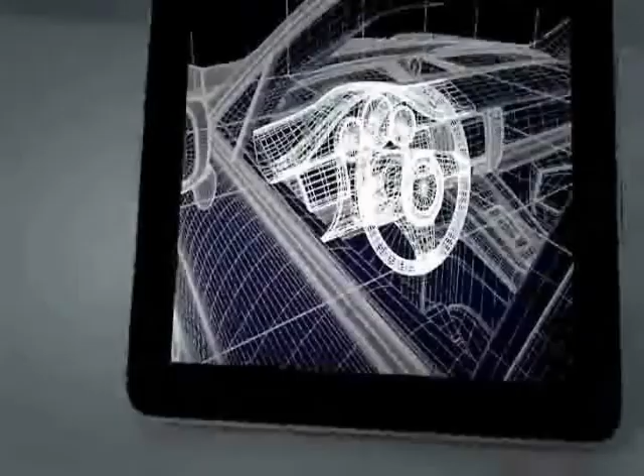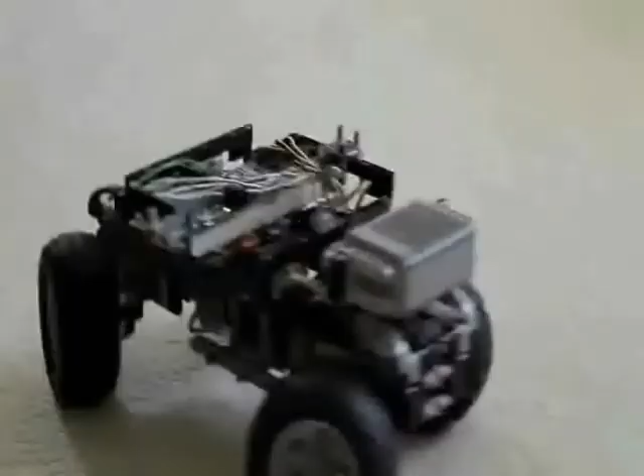The mission is to show several technological paradigms intended to illustrate and explain the relationship between artificial intelligence, deep learning, cognitive neuromorphic architectures, autonomous vehicle controllers, and complex mathematical algorithms with respect to machine learning as it relates to the autonomous vehicle platform. In addition, I will show an actual representation of an autonomous vehicle prototype.

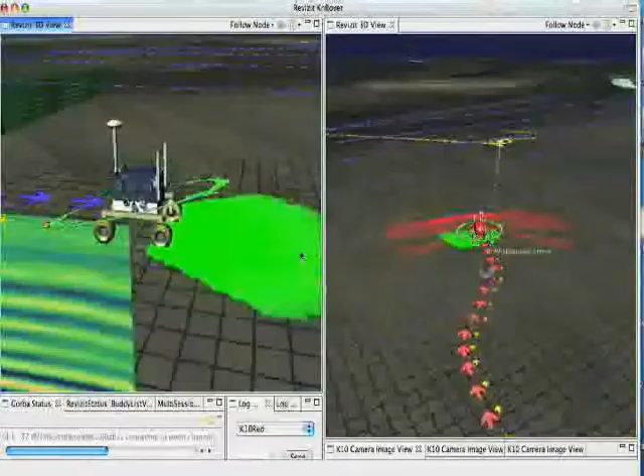Cognitive ability of the nervous system: neurons, dendrites, and synapses, neuromorphic architectures, and the deep learning science engineering paradigm. This segment of the presentation will illustrate how to build a deep neural net, choosing a number of layers and neurons with deep, densely connected networking strategies.

The artificial intelligence multi-layer network is composed of input node layers, hidden node layers, and output node layers. They specifically integrate the inputs and feed the information to the outputs, and you can create this with software mathematical algorithms.

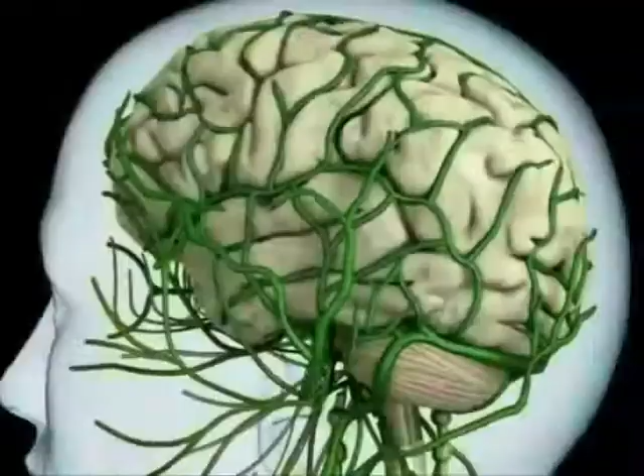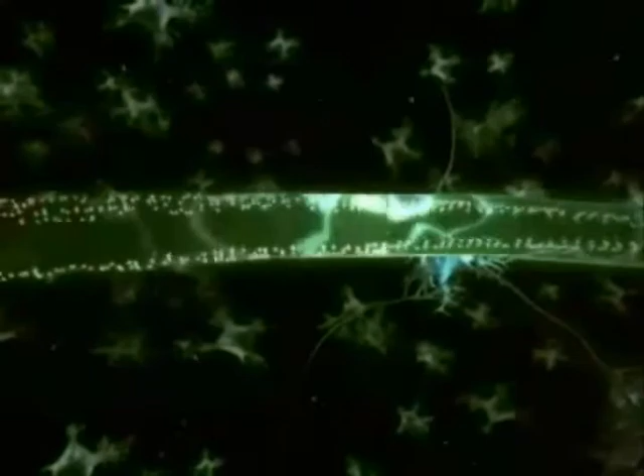Computational neuroscience is a branch of neuroscience which employs mathematical models, theoretical analysis, and abstractions of the brain to understand the principles that govern the development, structure, and cognitive abilities of the nervous system.

Artificial intelligence forms part of the cognitive engineering science, which is the scientific study of the mind and its processes. It examines the nature, tasks, and function of cognition.

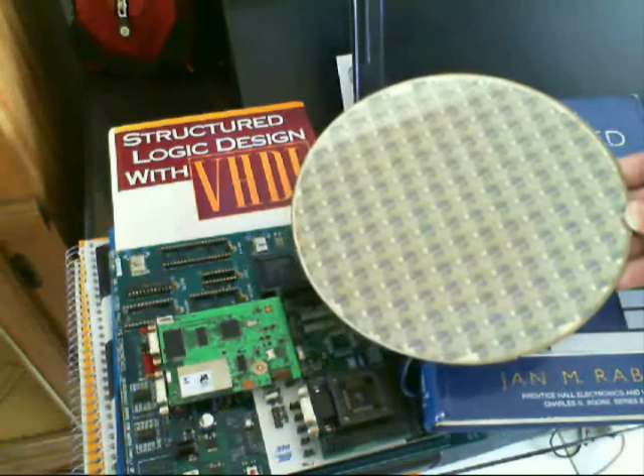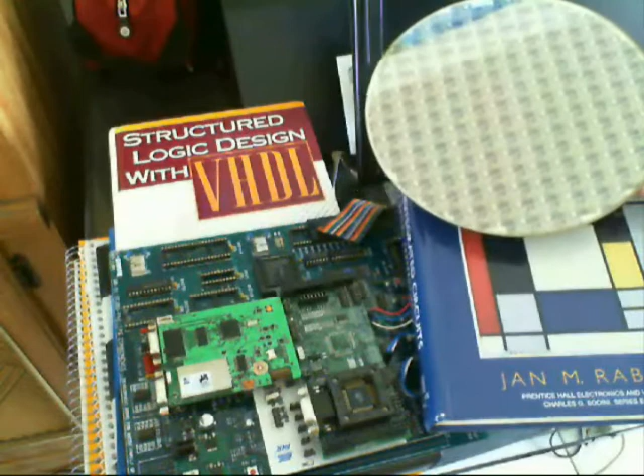These neuromorphic architectures model in silicon the massive parallel way the brain processes information, as billions of neurons and trillions of synapses respond to sensory inputs such as visual and auditory stimuli. Those neurons also change how they connect with each other in response to changing images, sounds, and the like. That is the process we call learning.

These architectures, which incorporate brain-inspired models called neural networks, do the same. That is why I have created this neuromorphic architecture and platform.

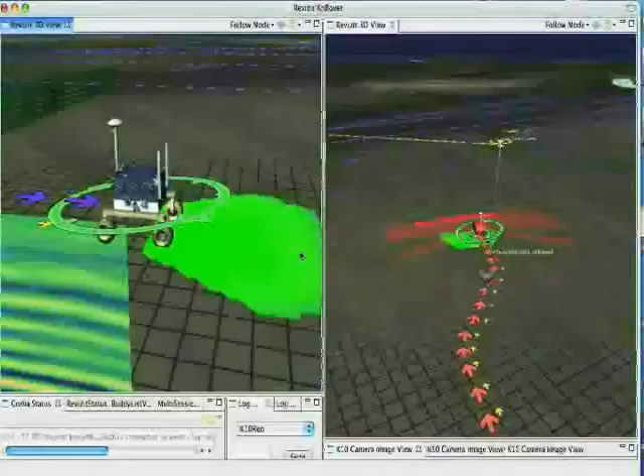The autonomous vehicle and robotics system uses a navigation algorithm for dynamic, uncertain environments. Moving obstacles are supposed to move on typical patterns, which are pre-learned and represented by Gaussian processes.

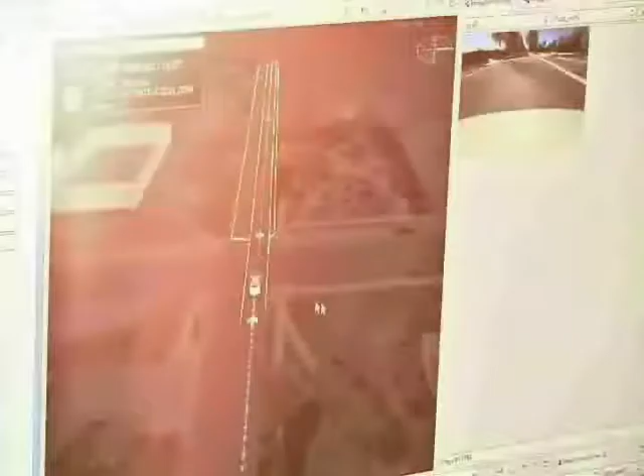A prediction function-based algorithm is used to implement robust freeway driving in autonomous vehicles. A prediction engine is built to predict traffic scenarios.

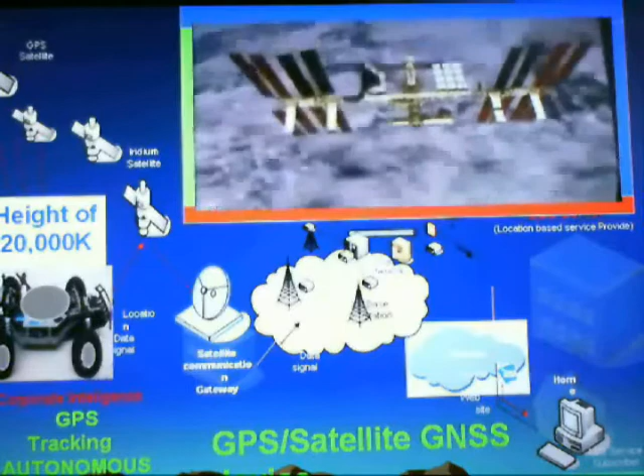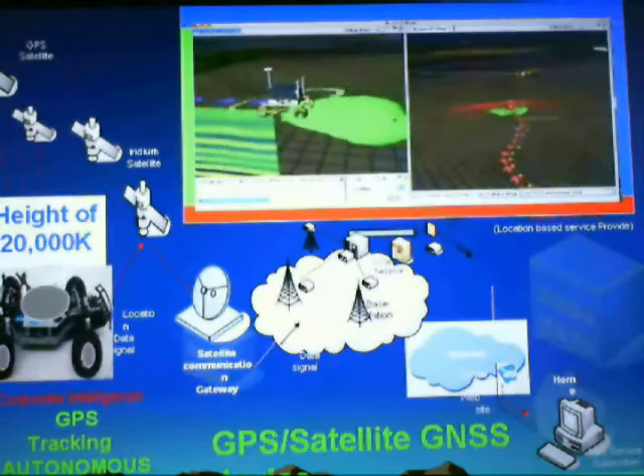A planning framework is used to improve the level of intelligence and driving quality of the autonomous vehicle. A reference planning layer generates kinematically and dynamically feasible paths, assuming no obstacles on the road. Then a behavioral planning layer takes static and dynamic obstacles into account.

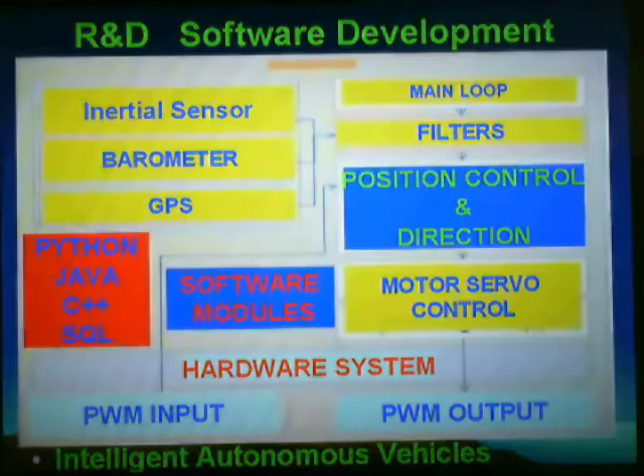Other algorithms used include a point-based Markov decision process algorithm for robust single-lane autonomous driving behavior control under uncertainties. Autonomous vehicle decision-making is modeled as a Markov decision process, then extended to a QMDP framework.

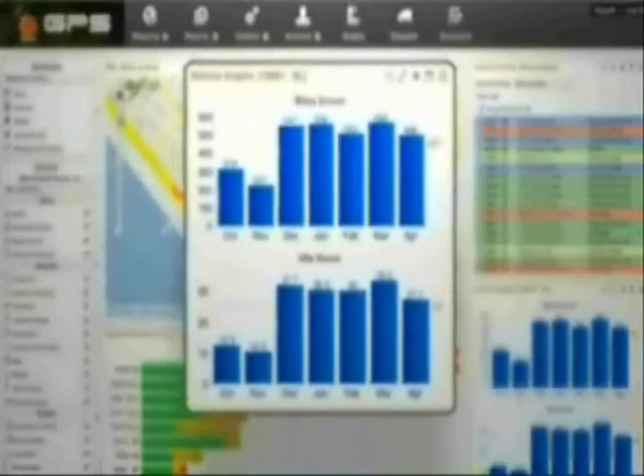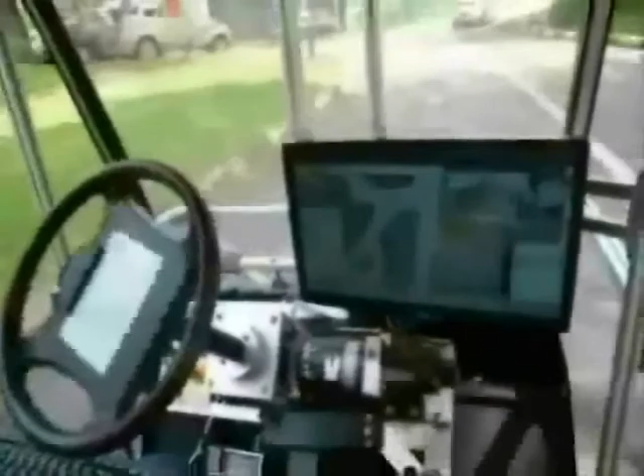The R&D cloud software solutions, supported by an SQL database paradigm, take data and protocol message parser and parameter structure for calculation and statistical analysis in order to provide map views and historical views, as well as to program the path by which the autonomous vehicle will travel.

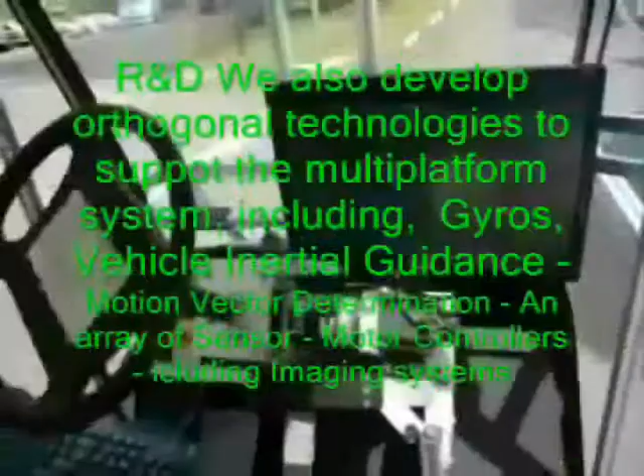The cloud computing paradigm provides quick access to data and information from internet and web servers via the WiFi network, so as to provide traffic info, weather visibility, and road conditions. GNSS provides the program pathway.

The car of the future is digital and fully connected. The requirements are changing, and it's not enough to just make good cars any longer. We have recreated an ecosystem to integrate artificial intelligence and speech recognition within the autonomous vehicle and robotic controllers.

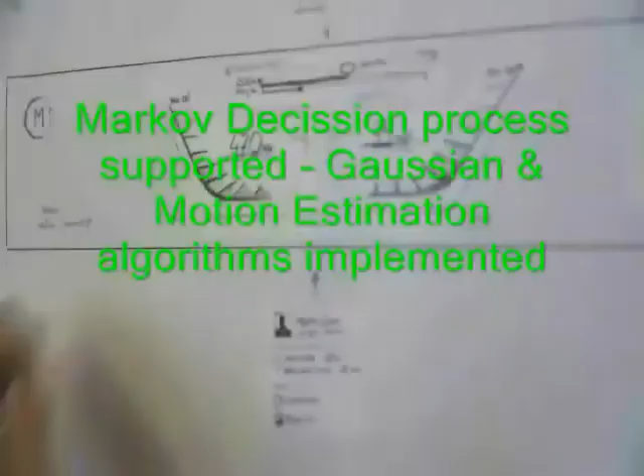Here I illustrate a working prototype of a conceptual digital platform, integrated and installed. Core Inteltech R&D provides autonomous and robotic digital platform controller solutions.

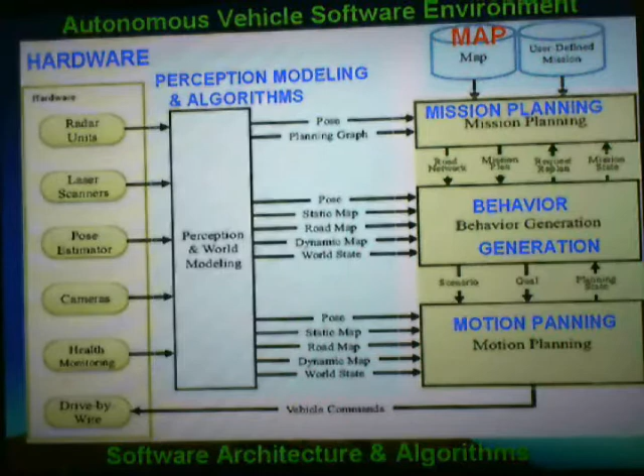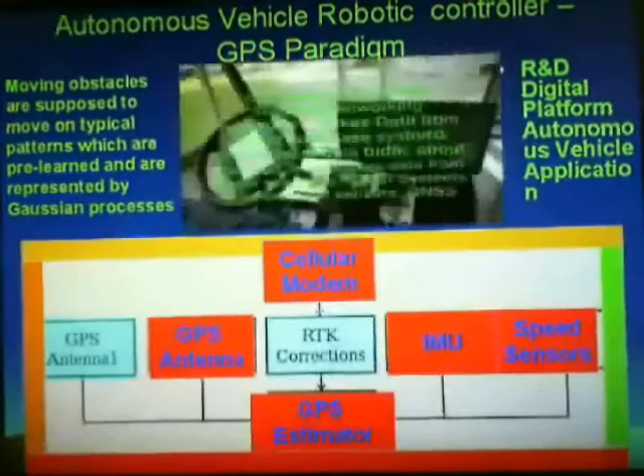Using onboard sensors, global positioning systems, lasers, radars, and cameras to track other vehicles, detect static obstacles, and localize itself relative to the road model, a three-layer planning system combines mission, behavioral, and motion planning to drive in urban environments. This prototype is an alpha test site presenting the design and implementation of an autonomous driverless vehicle for populated urban environments. The system explicitly maps static obstacles, detects and tracks moving obstacles, considers unobserved areas, provides a motion plan with safety guarantees, and executes it.

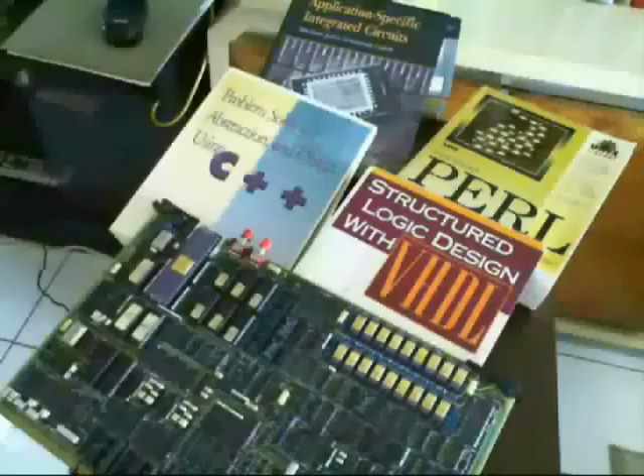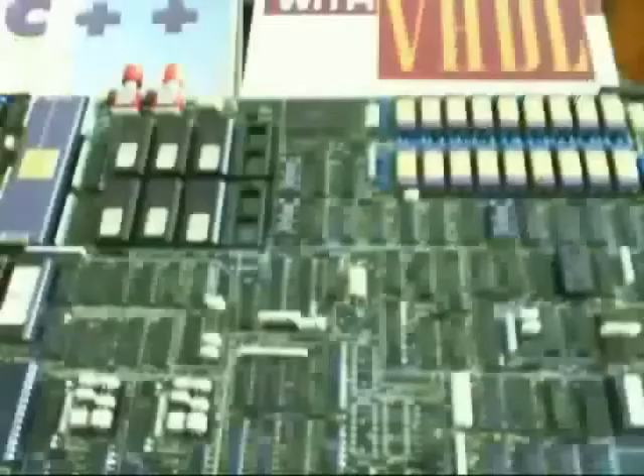The autonomous car software solutions and modules. The software can take data from visual cameras, laser scanners, radar systems, GNSS sensors, and cloud database units.

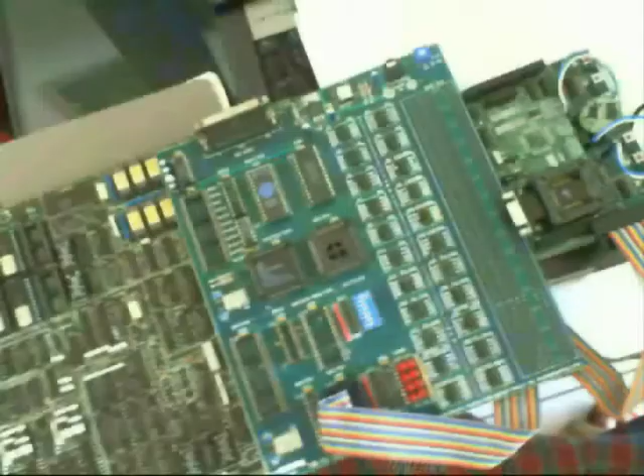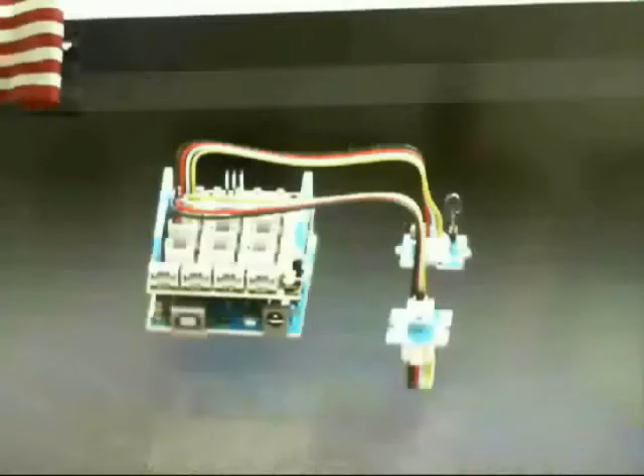We use state-of-the-art hardware and software development tools. Our prototypes are developed with sophisticated in-circuit emulators and software simulators. The radio control transmitters and receivers and the telemetry systems are designed in our labs in Miami, USA. The digital reference platform is integrated by mathematical and artificial intelligence algorithms and software models.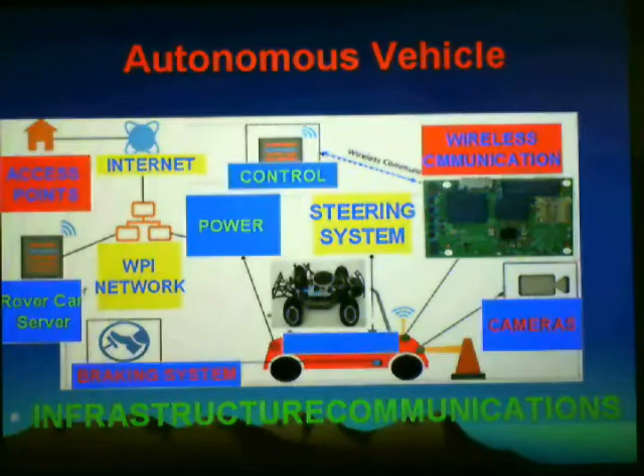Markov decision process, Gaussian processes, and motion estimation algorithms are applied and supported. The autonomous system architecture is integrated by a vehicle and robotic controller, a set of software modules, vision software models, navigation models and algorithms, and hardware modules for implementation of gyros, inertial guidance, radar, and GPS. The infrastructure supports communications protocols for wireless, Internet, WiFi network, access points, SQL Server database, cloud, and object computing.

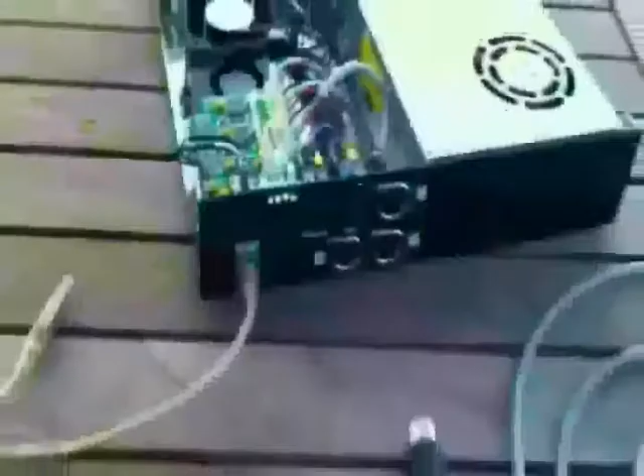Cloud computing provides access to data and information from Internet and web servers. Programming modules were developed with Python software, consisting of several mathematical algorithms in order to control the servo motors. The code controls movement.

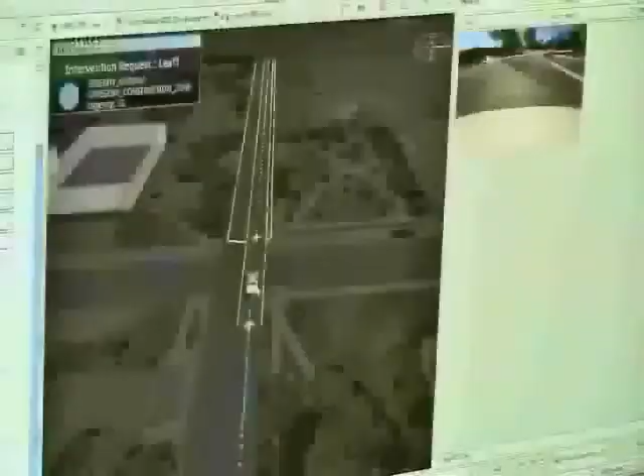The R&D is a three-process development paradigm supported by CAD, CAM. These are the patterns generated in software to provide a specific solution to your final tasks in Python programming modules, software, and complex mathematical algorithms.

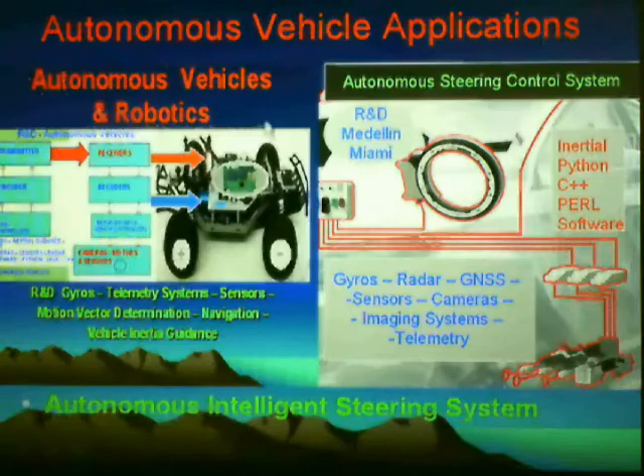The autonomous controller robotics system is supported by an accelerometer for determining outside influences, a compass, and magnetometer in order to determine direction, navigation, and location. This prototype illustrates proof of concept and represents an alpha test model of our first generation autonomous vehicle robot system.

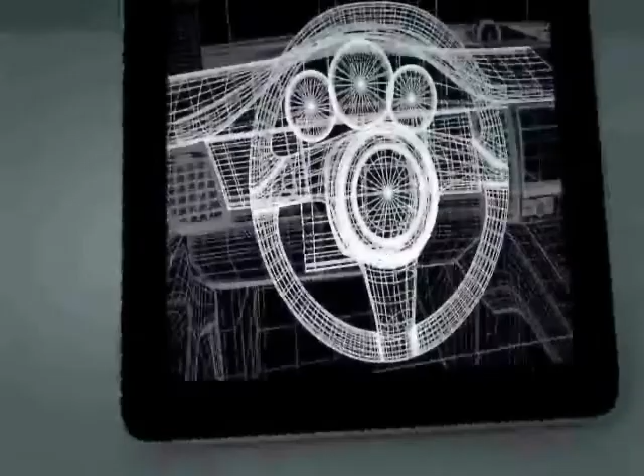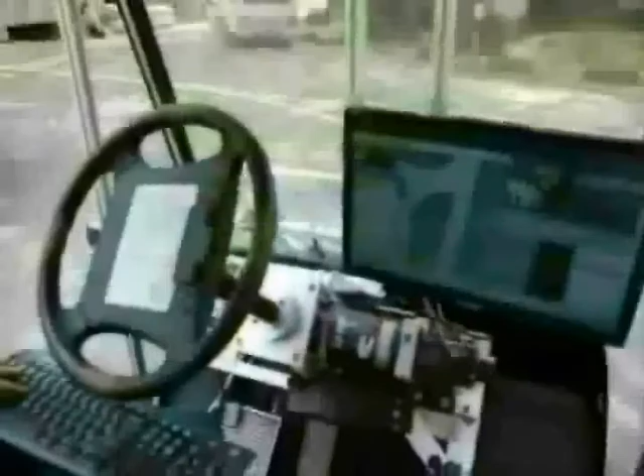The autonomous vehicle and robotics controller is supported by an accelerometer. The intelligent vehicle integrates GNSS technology and external sensor data, object identification, object classification, and algorithm-based decision-making.

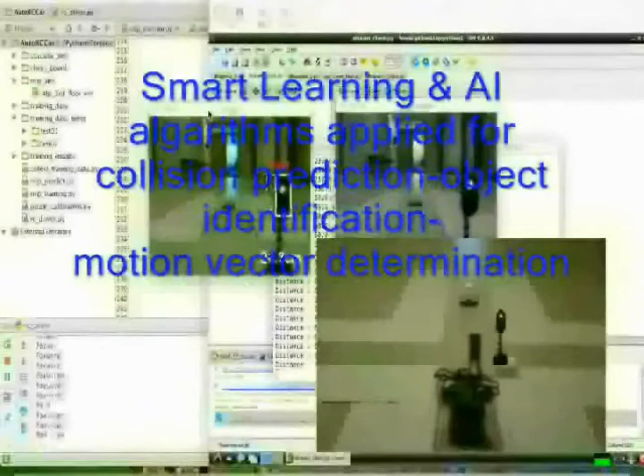Illustration of the braking system. The radar system scans the speed of vehicles ahead, and the orientation sensors track motion and balance. The processor provides 3D information implementing object identification, motion vector determination, and collision prediction.

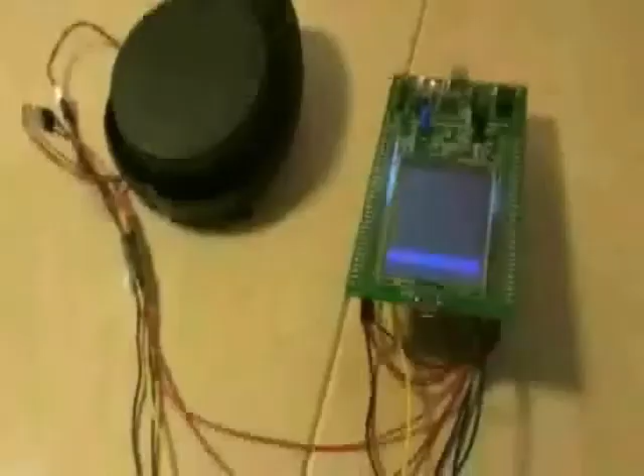The autonomous vehicle is supported by a LiDAR system. It is a solid-state LiDAR system that provides 360-degree high-resolution mapping with short to long range measurement distance using a laser light.

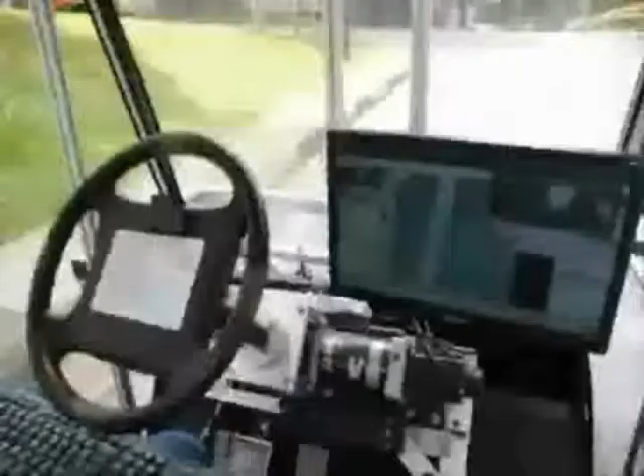It is integrated by an optical front end, signal conditioning, analog to digital conversion, control and synchronization with an external light source. Signal processing is provided for distance output and an ASIL-B safety element. The light detection and ranging system is an active form of remote sensing, measuring distance to targets and surfaces using narrow beams of near-infrared light.

GPS is an important aspect of the LiDAR system, used to calculate the coordinates of targeted objects. Spatial interpolation is supported; software is used to classify ground returns. A range of interpolation algorithms convert ground points data into three-dimensional surfaces. Scanning pattern and rotating mirrors with a large footprint LiDAR support 5 meters to 25 meters.